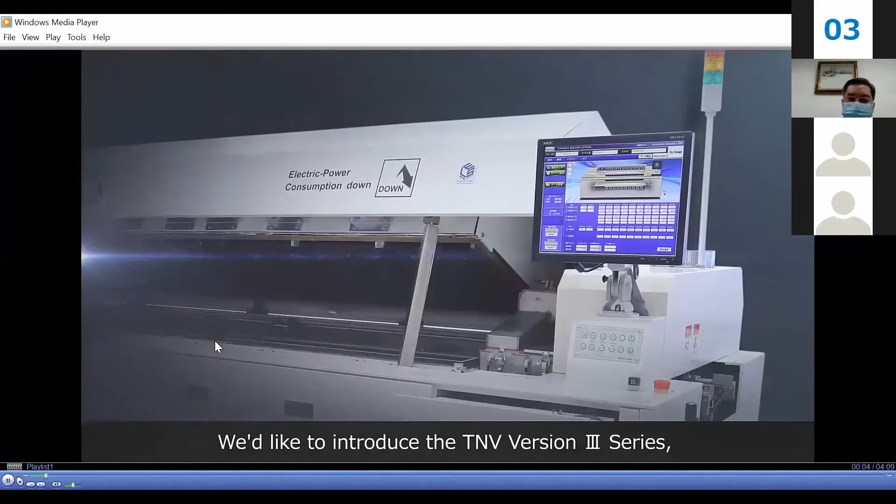Maybe I will start with sharing our product video. We'd like to introduce the TNV version 3 series, which is the latest model of our reflow soldering system, to respond to customers' needs. We believe that improving production efficiency is our most important task among all our customers' needs. Therefore, we focus on reduction of maintenance frequency, energy saving, and responding to IoT, and have improved our product to the highest level in the industry.

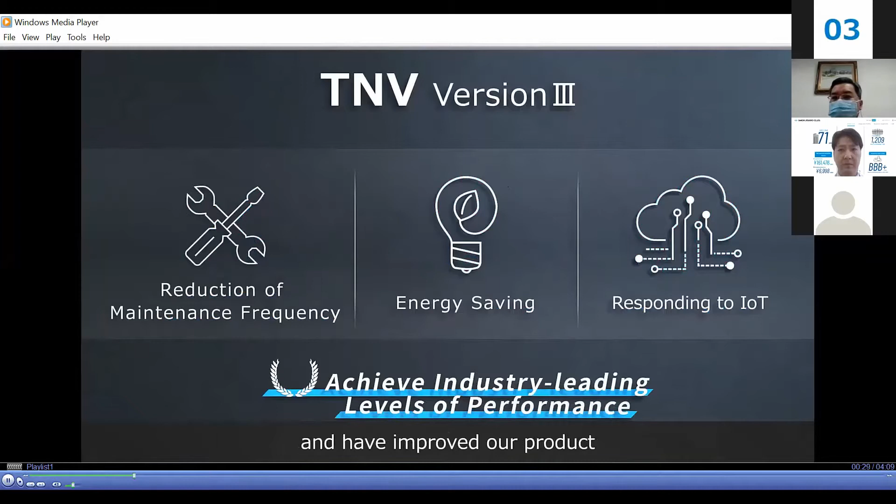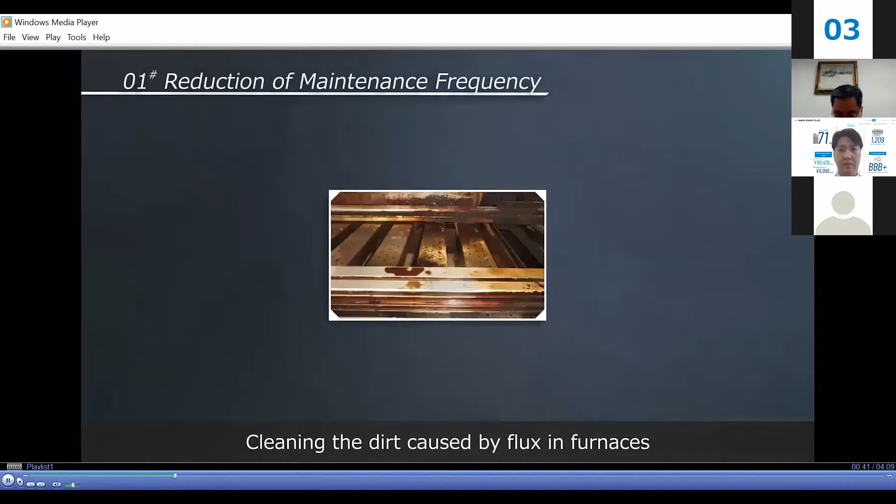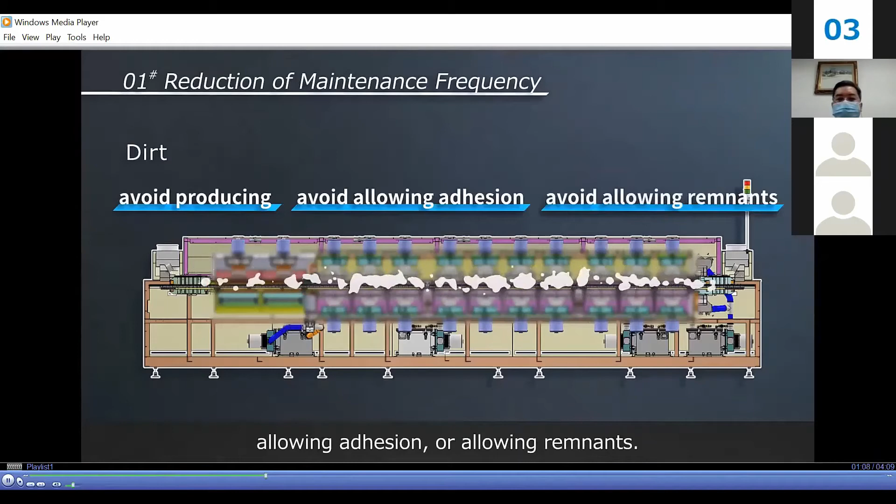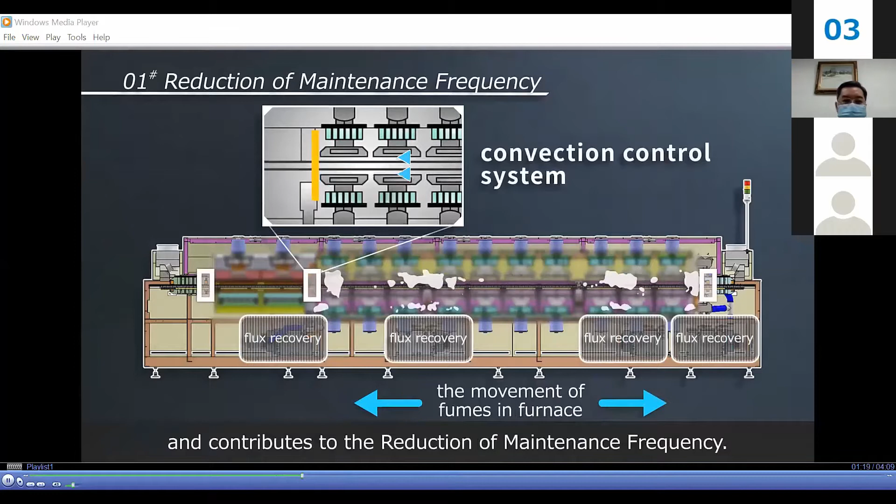First, let's introduce the reduction of maintenance frequency. Cleaning the dirt caused by flux in furnaces requires a lot of time and labor. When heating the mounted substrates, various fumes such as flux are generated in the system. We reviewed the mechanism of dirt contamination and worked to avoid producing pollutants, adhesion, or remnants. We specified the parts that produce flux fumes using convection control system that leads air to flow efficiently, contributing to the reduction of maintenance frequency. According to field test results, the cleaning cycle has been expanded 2 to 3 times.

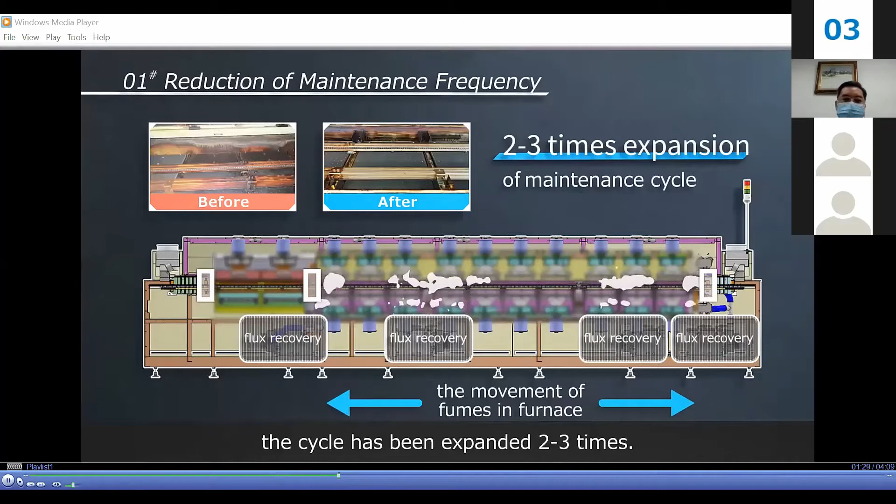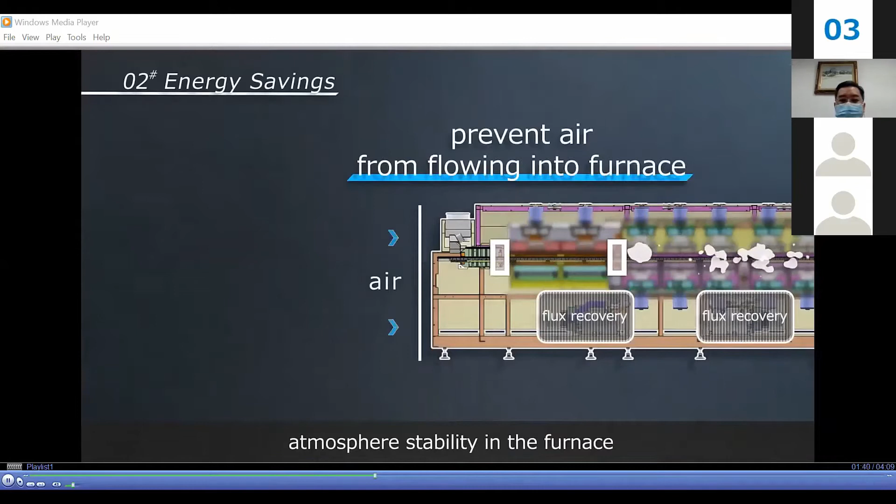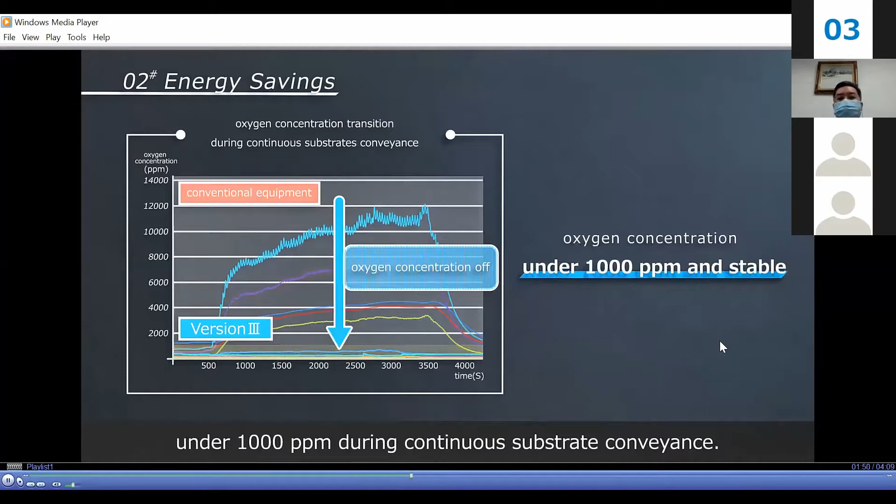Next, let's explain energy savings. Thanks to the furnace convection control, atmosphere stability in the furnace has been improved drastically. It is easier to manage the oxygen concentration in all zones under 1000 ppm during continuous substrate conveyance. In addition, by optimizing both software and hardware, such as startup system improvements, we have achieved an industry-leading level of reduction in nitrogen consumption and electricity consumption.

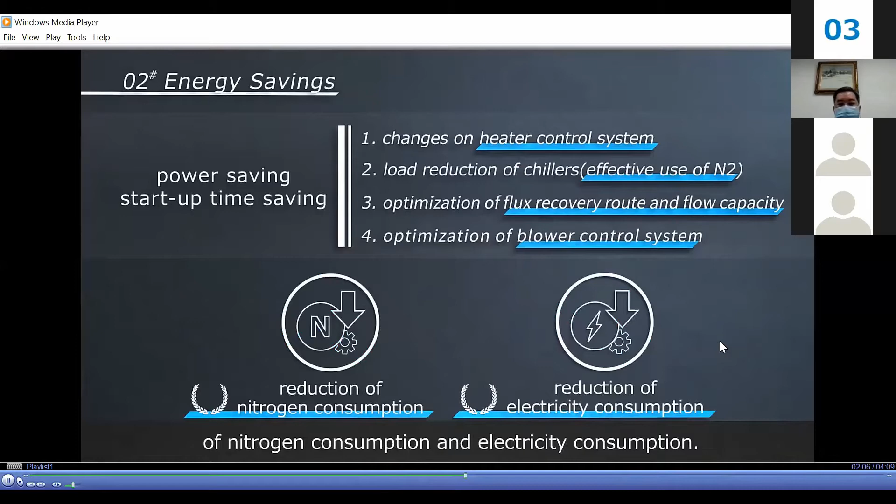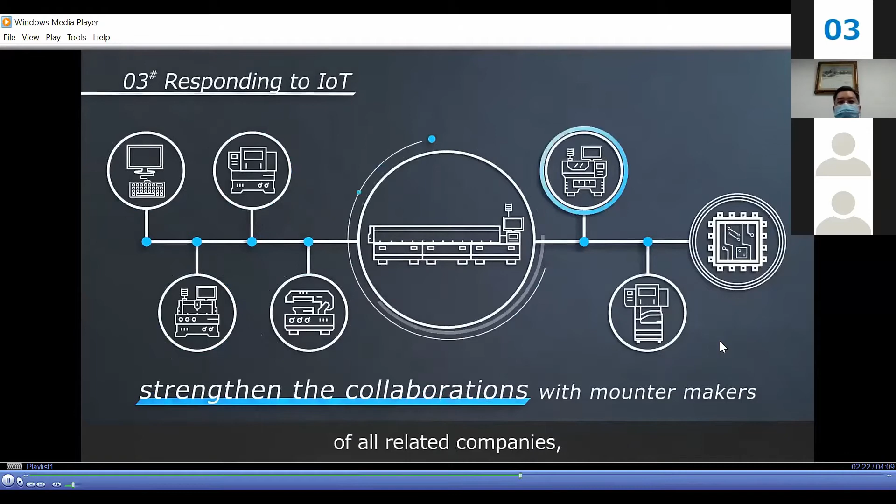Third, responding to IoT. Towards the sustainable development of IoT, we have been strengthening collaborations with mounter makers, working on automatic setup switching functions with all related companies, and coping with production control systems.

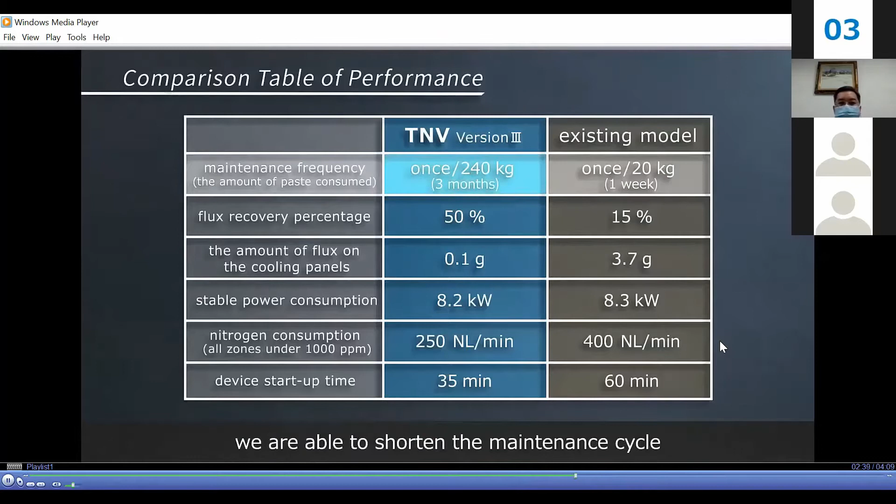This is the performance comparison with an existing model. Thanks to the newly developed furnace convection control, we are able to shorten the maintenance cycle and reduce flux drop on substrates drastically, which is a big contribution to the reduction of running costs for our clients.

Last, please allow us to introduce the lineup of the TNV version 3 series. We set up 8 zones, 10 zones, and 12 zones on the M-size model with a maximum substrate width of 300 millimeters, and the L-size with a maximum substrate width of 510 millimeters, both of which are dual-lane type.

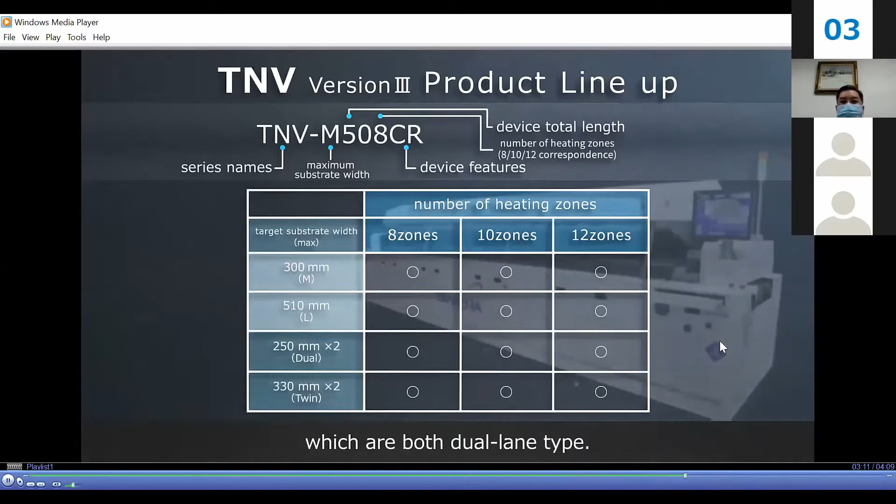We will keep on innovating the Tamura reflow soldering system to improve production efficiency for our clients. We are always aiming for reflow at the world's highest level, and we sincerely hope that you will consider purchasing our latest high-performance reflow soldering system. We seek to reduce production opportunity loss wherever possible through the reduction of maintenance frequency and energy savings, achieved through the reduction of nitrogen and electricity consumption. We will also seek to respond to IoT as much as possible going forward.

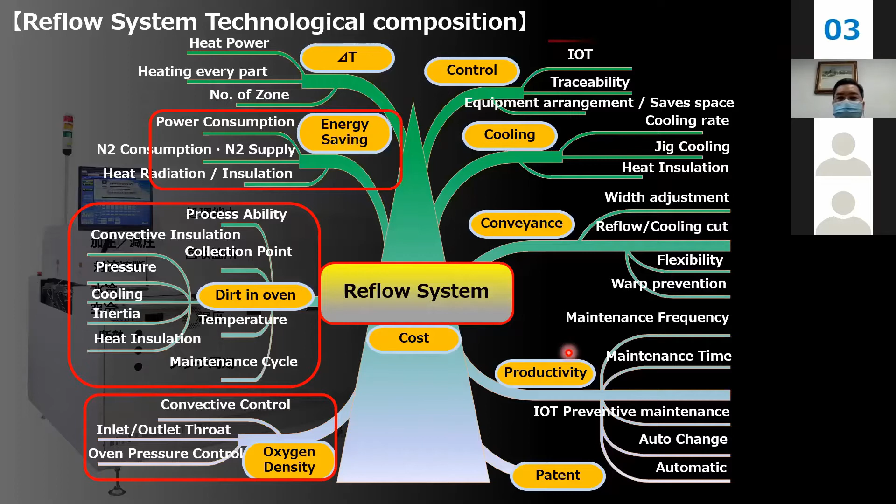Today I have 3 subjects to discuss. First is what customers want for the SMT production line. Second is the concept of the Tamura new product and its features. This is part 3 of making a good reflow system, but today I'm emphasizing making the dirt in the oven - meaning the flux issue in the oven - and second is energy saving and the reduction of N2 consumption for the best oxygen density level performance. Lastly is IoT, traceability, functions, and so on.

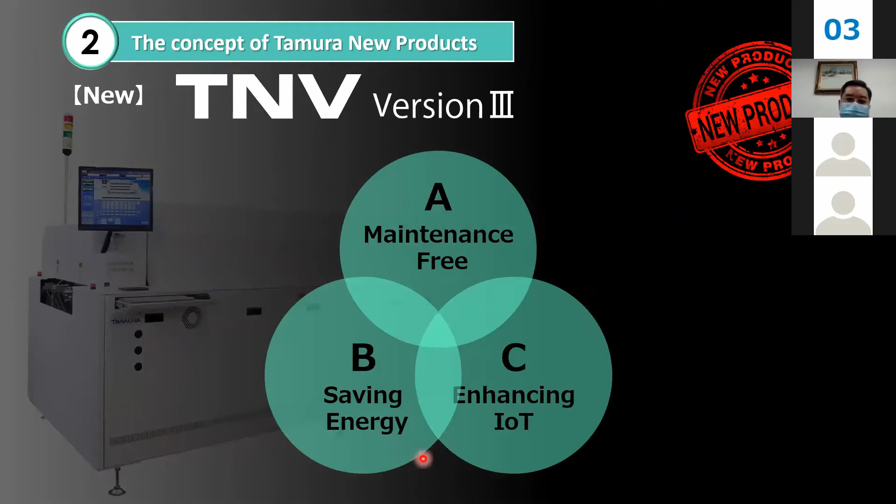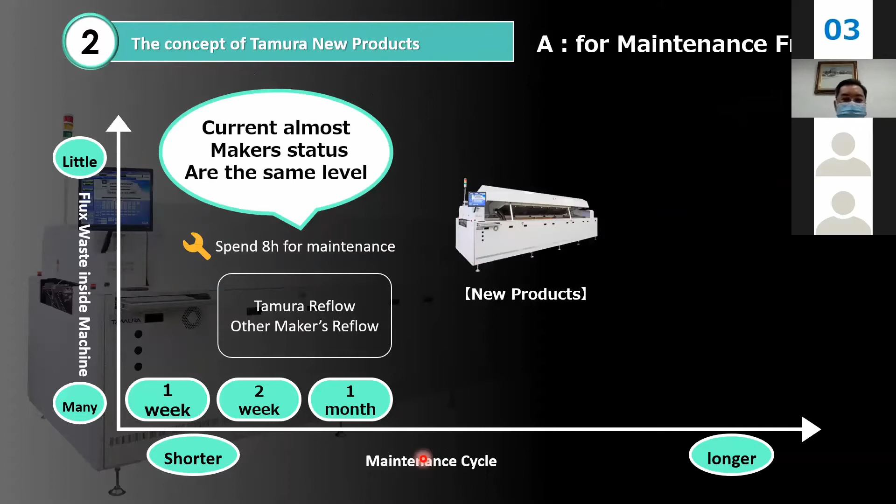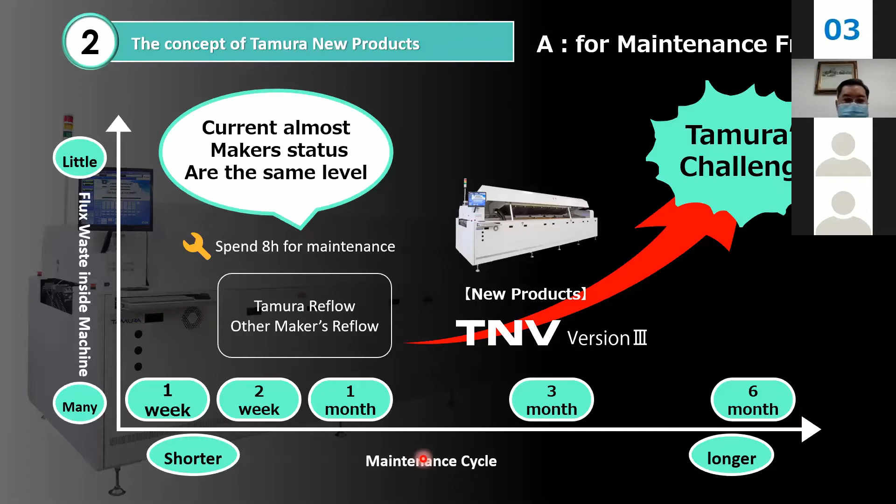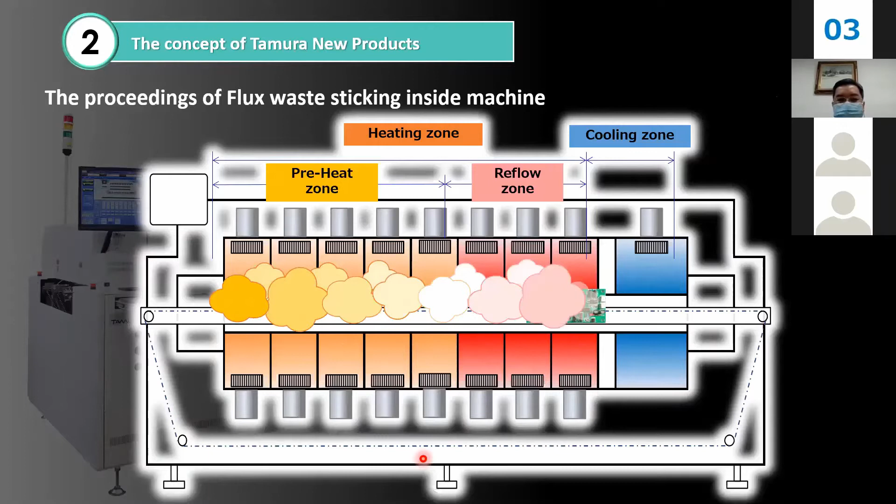This is a typical reflow process. When the PCB passes through the oven, a lot of fumes are produced, and these fumes form from gas, becoming liquid at the inlet area and also the cooling zone areas.

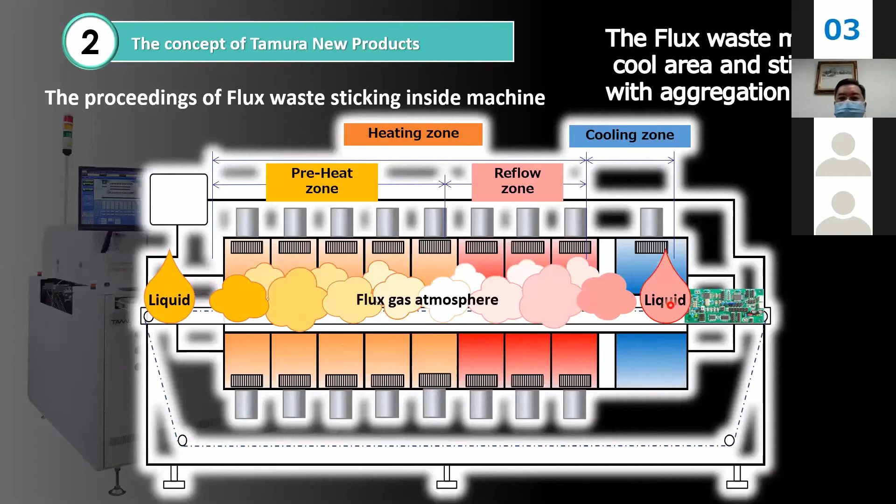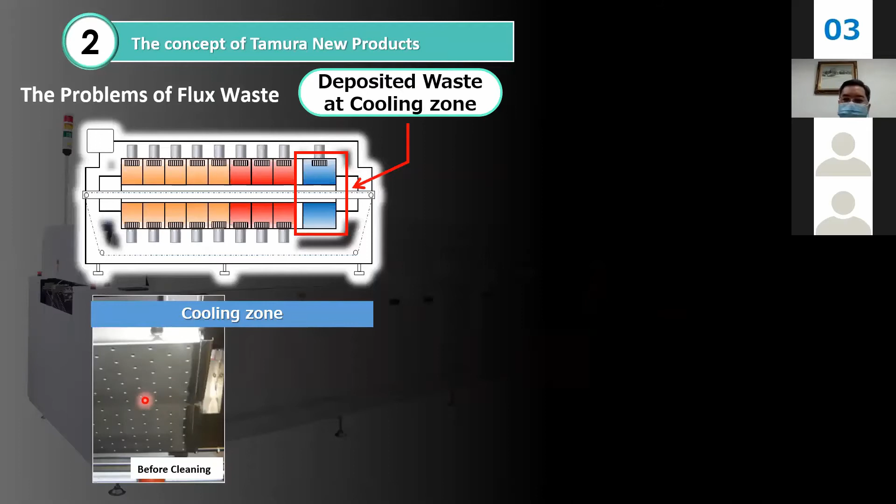So after cleaning the reflow, the cooling panel becomes clean. But a month later, flux stain accumulates on this cooling panel. If the customer doesn't clean it in time, excess flux will form and drip onto the PCB, creating a defect.

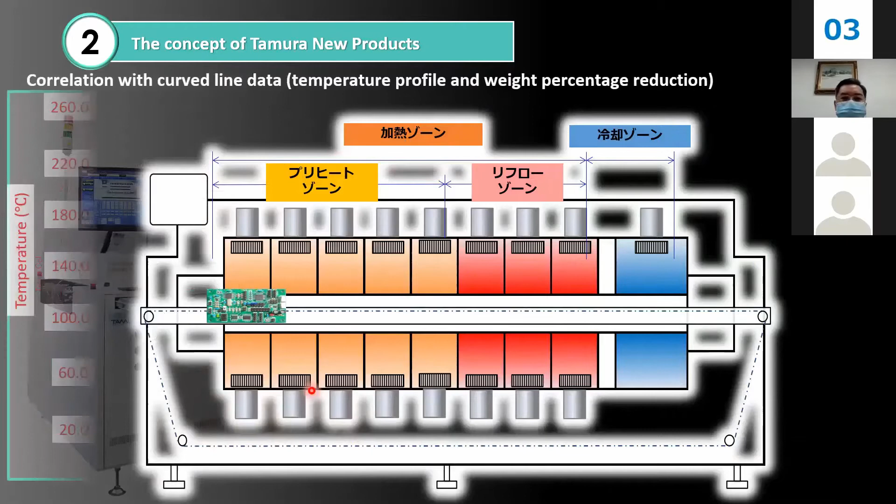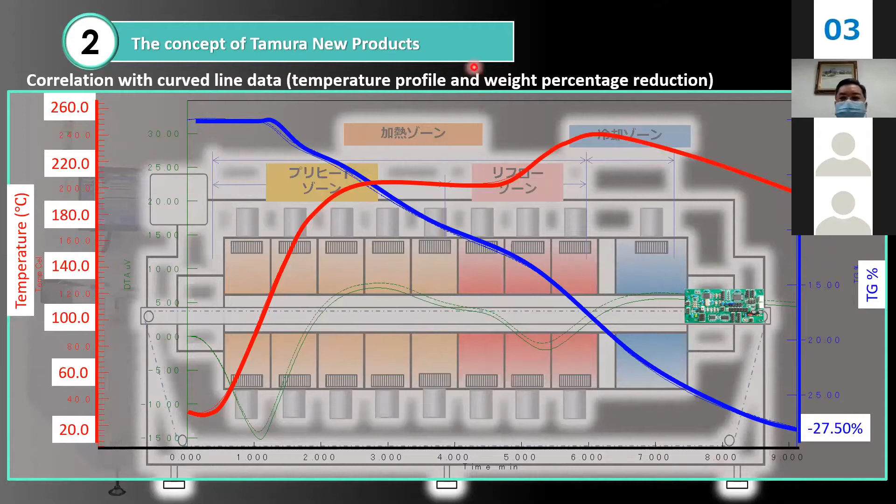At the end of the preheating, the mass has lost 12.5%, and further loss down to 18.5% when the temperature reaches peak temperature. Throughout the whole process, the solder paste weight has lost 27.5%, which means 1/4 of the paste printed on the PCB has been lost, forming flux residues and stuck in the oven.

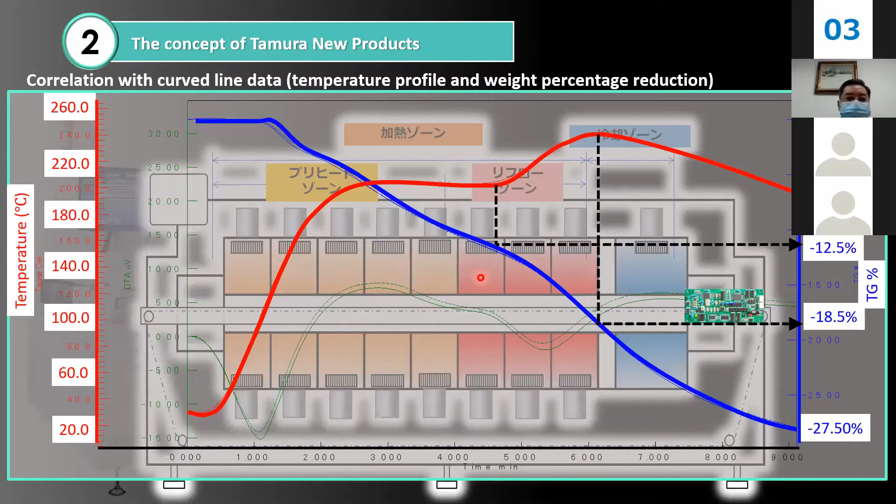We have collected both substances from the oven. At the preheating area, we collected the solvent from the solder paste. At the reflow zone area and cooling zone area, we collected the rosin from the solder paste, and this is more dark in color, more sticky, and more difficult to clean.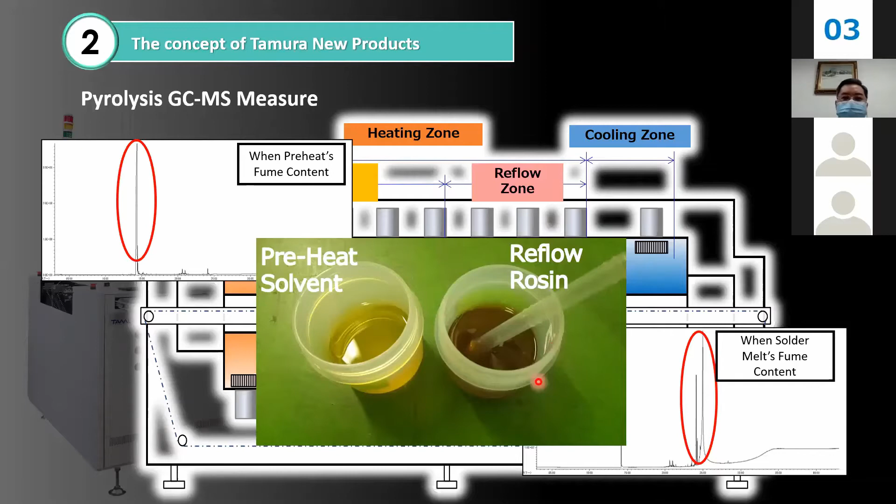This is our current model, TNV version 1 design. There are 2 flux collectors installed, with a total flux collection rate of 5 plus 10, totaling 15. The cooling panel at this area easily forms a flux stain.

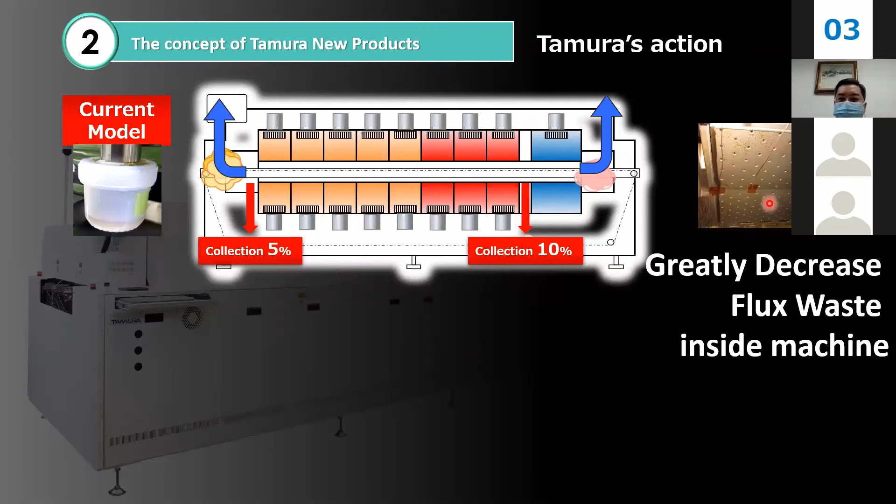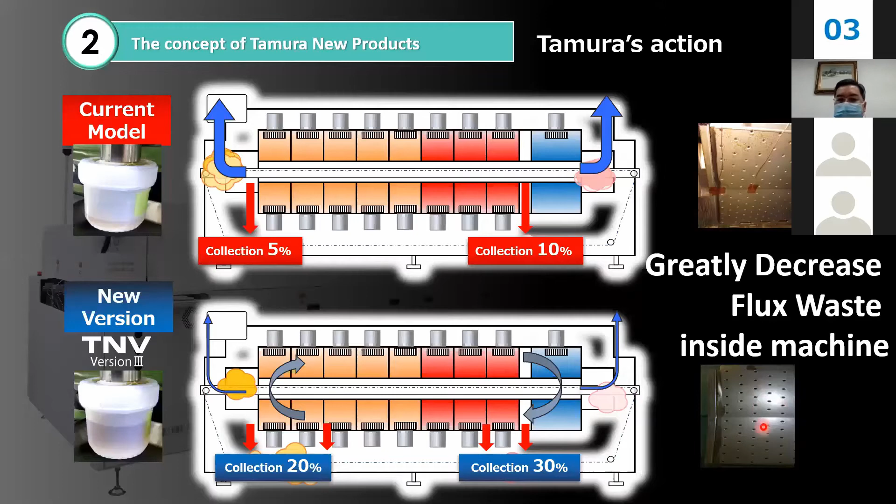As for the version 3 design, we have increased the flux collectors from 2 units to 4 units. We added 2 additional units at the preheating and also the reflow zone area, with a convex flow design that helps minimize flux leak at the inlet and also at the cooling zone area. As you can see, the cooling panel still remains clean after a month of testing.

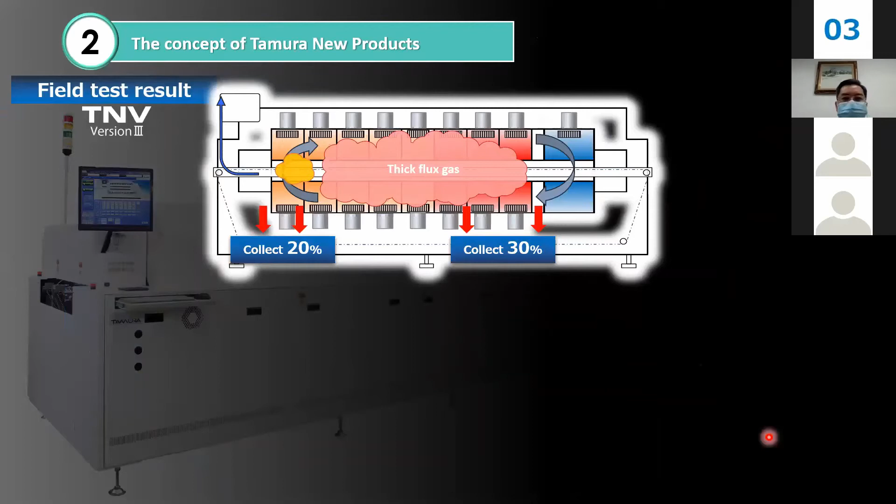This is a test from one of my customers. The first 2 flux collector units have collected the solvent, that's why you can see the color of the solvent still in liquid form and quite clear.

Compared to the reflow zone and cooling zone area installed in between the heating and cooling area, the solid flux has been collected at this flux collector. This has continuously run for a month, 24 hours a day.

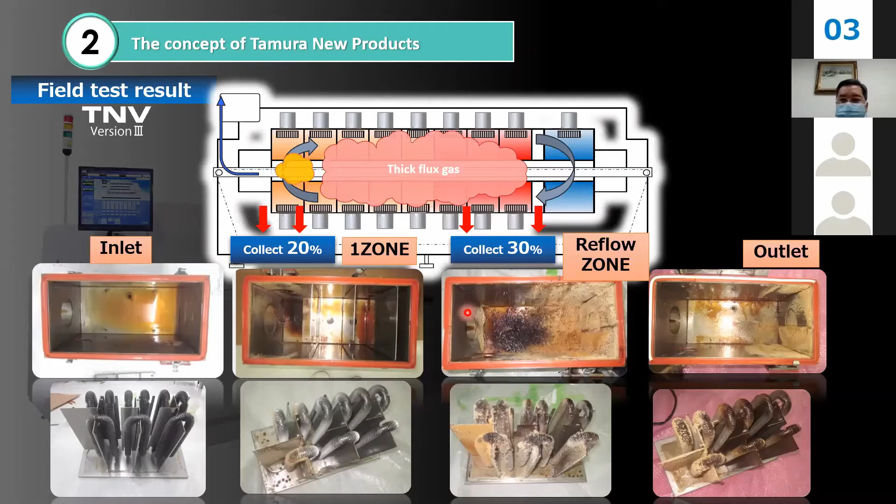With the improvement of the flux collection rate up from 15 to 50%, it helped to make the oven inside become clean and reduce the flux jam at the lead screw area. So the downtime for the machine has also been reduced.

Second topic I would like to share with you is about power saving, N2 saving, and also reducing startup time.

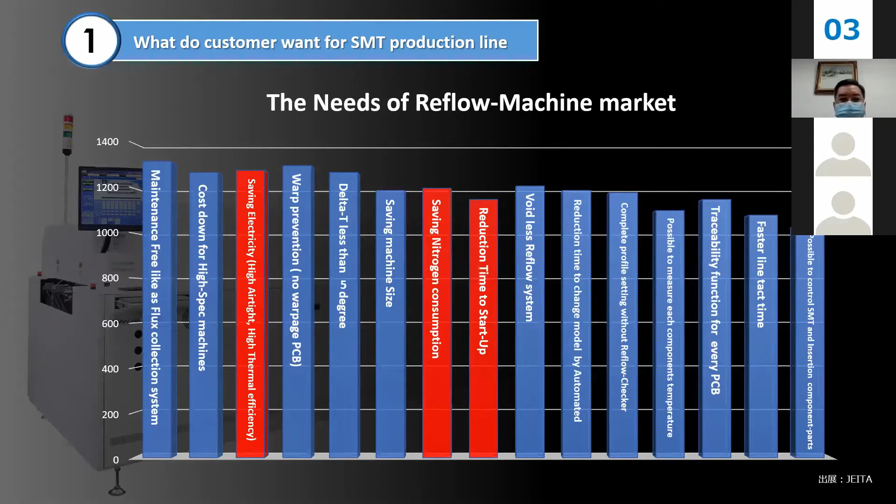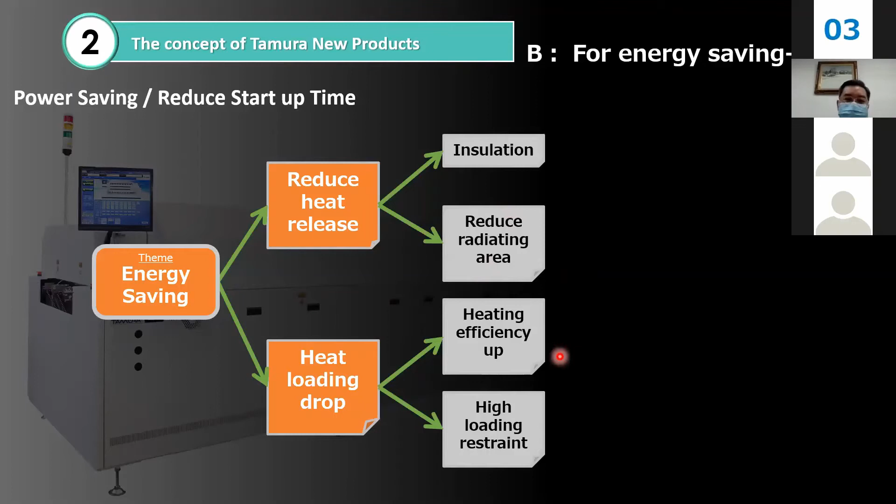For power saving, there are 2 concerns: to reduce the heat release from the oven, the heat load dropping, or reduce the heat load. So we have improved the insulation, also reduced the radiation areas. At the same time, we also increased the heating efficiency, as well as the high load restraint.

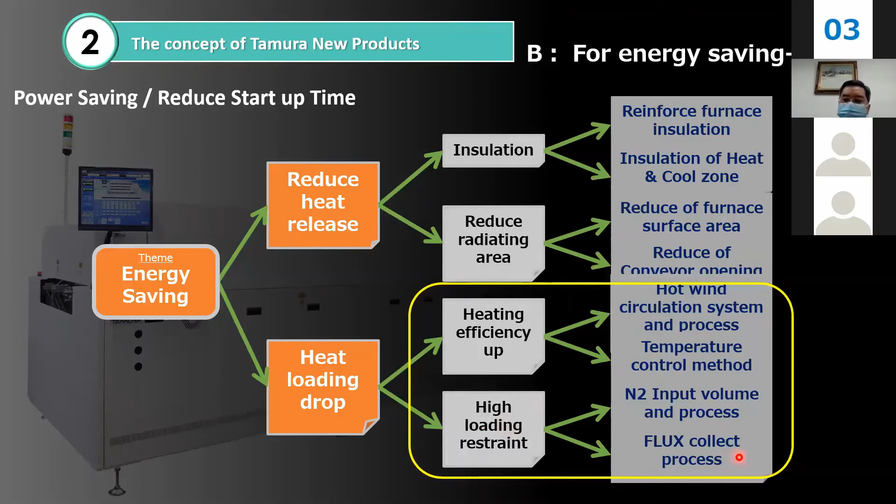There are so many things we have put effort into to improve the whole system, and today we emphasize on these areas. How we make it, I will explain in the next slide.

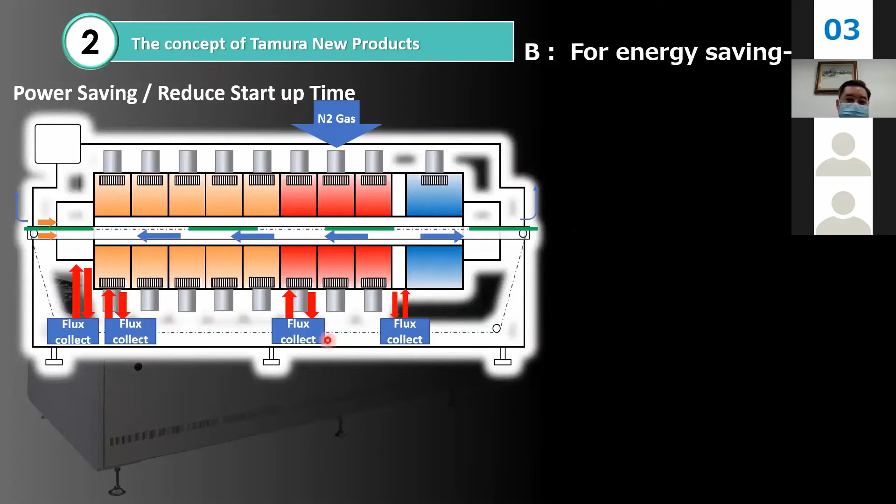For version 3, since we have increased the flux units from 2 units to 4 units installed in the system, the power consumption has gone up. As you can see from the heating display, the blue bar represents the power input into the heating zone. At zone 1, zone 6, zone 7, zone 8 there has been increased power consumption.

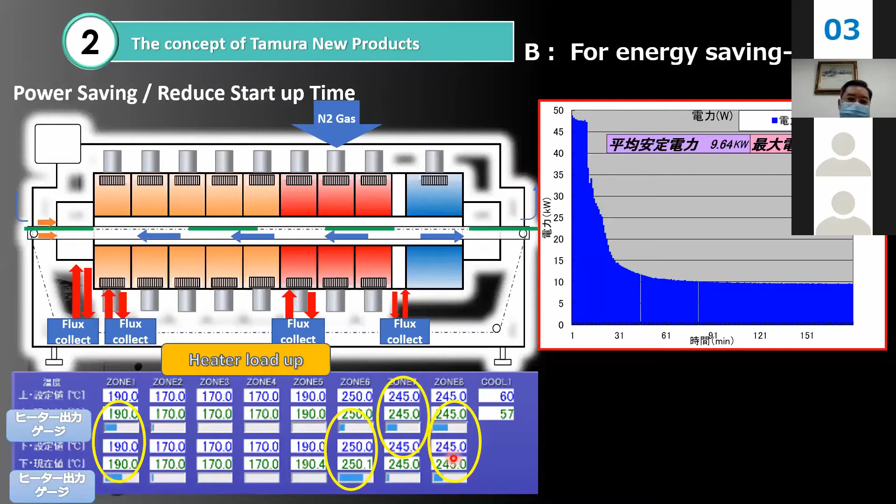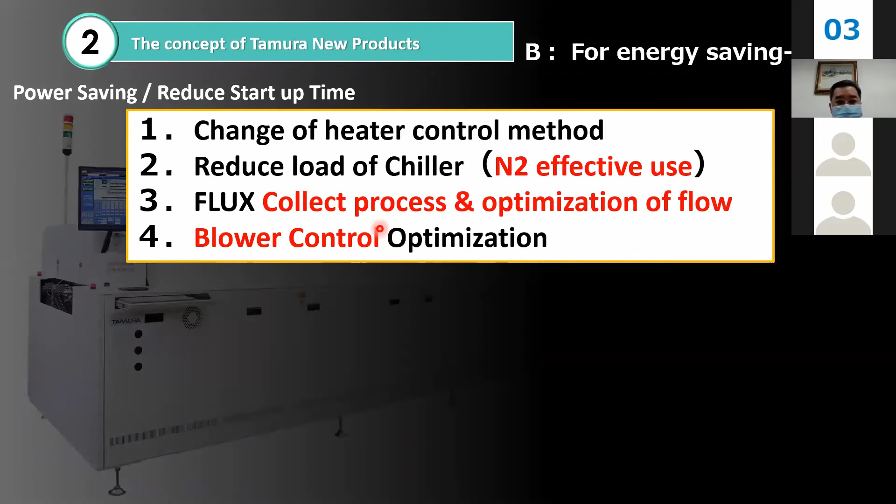But with further improvement of the heating control method, and also N2 effective use, flux collection process and flow optimization, and blower control optimization, we have greatly improved the heating up waiting time, from 60 minutes down to 35 minutes. The power consumption also slightly dropped from 8.36 kilowatts to 8.21 kilowatts.

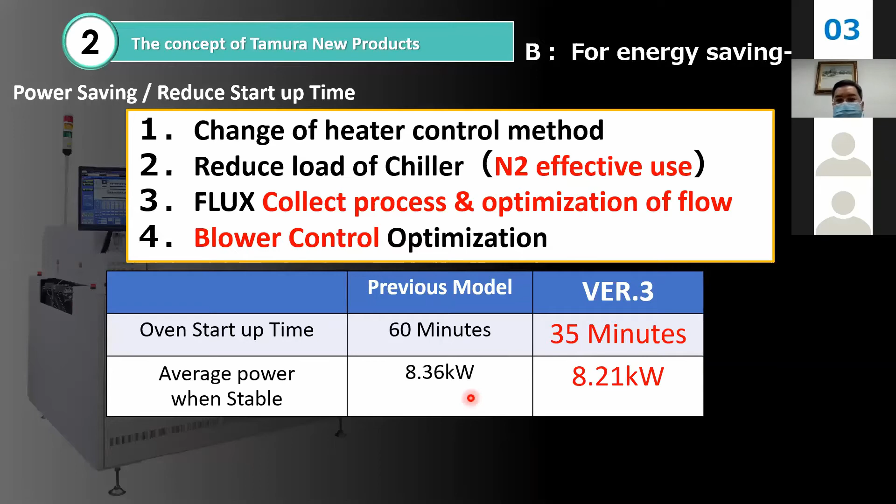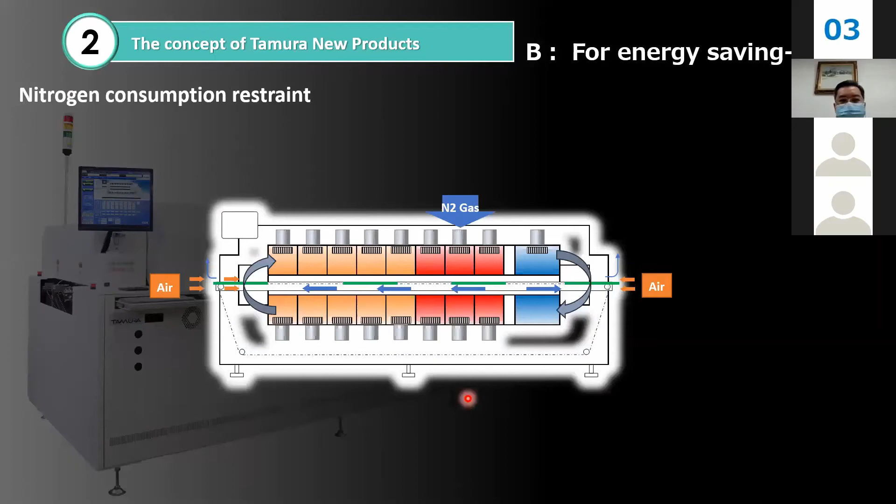Next, let's come to the N2 consumption. For version 3 design, O2 ppm is able to go down below 1000 and below, with a 250 liter per minute supply of N2 gas. This is our typical PCB size we used for testing and the blower setting.

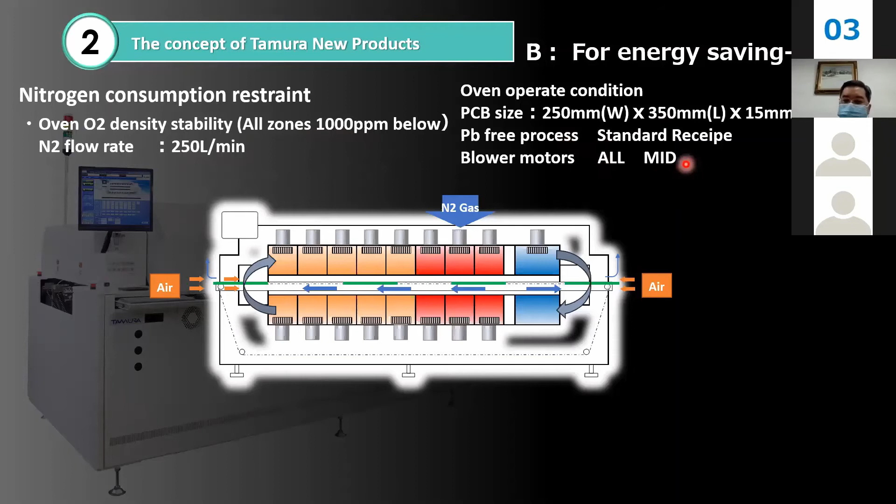With this convex flow design integrated in the version 3 system, we help plug external air from entering the oven, and also keep the flux stream and the N2 inside the oven, so that at the end result, N2 consumption is reduced. Let me show you in this next slide.

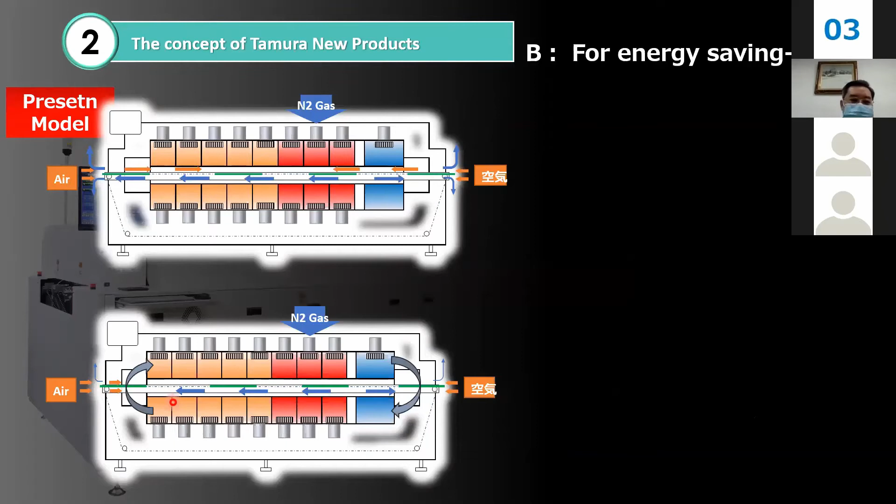For the present models, air easily falls into the oven. For version 3, it is being blocked. And this is the N2 density we have measured.

For previous models, this is the performance of O2 ppm for each zone area. This represents the reflow zone area because this is the main supply of the N2 locations, and this is the cooling area and cooling zone areas. So you can see different locations have different O2 ppm performance.

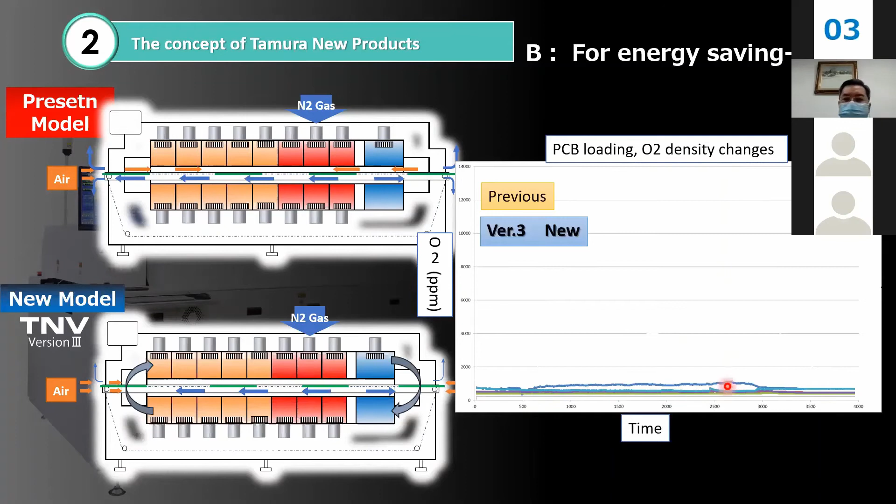As for version 3, with a convex flow design, all the heating zone areas maintain the O2 ppm at 1000 ppm and below, which means you have a great saving for N2 consumption of around 80 to 95%.

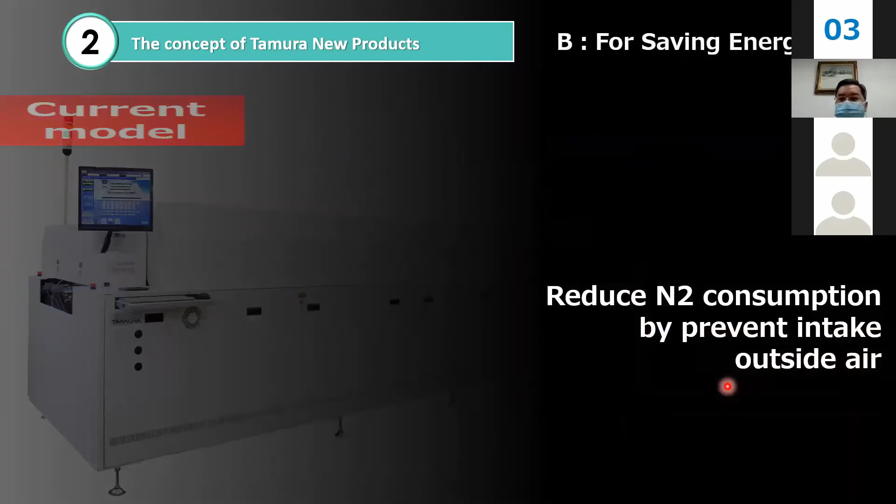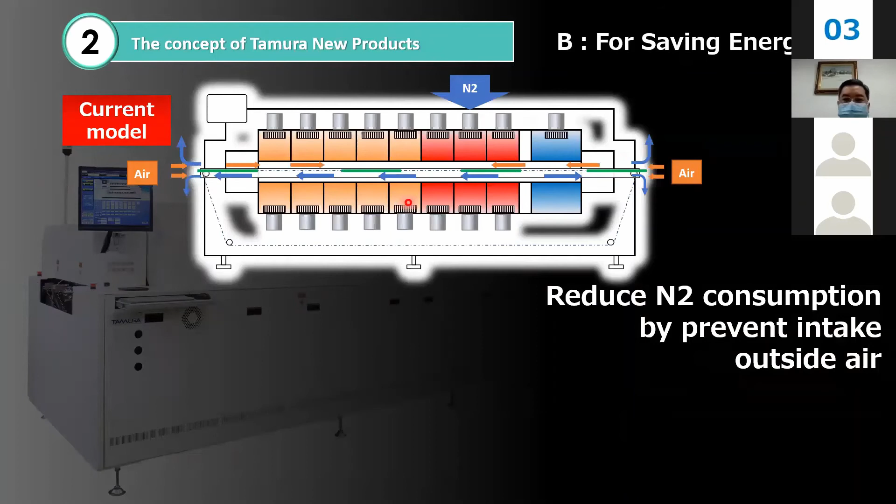And this is the current models. The performance of the N2 have been leaked and air also easily comes in. For version 3 models, air and N2 have been separated by the convex flow design.

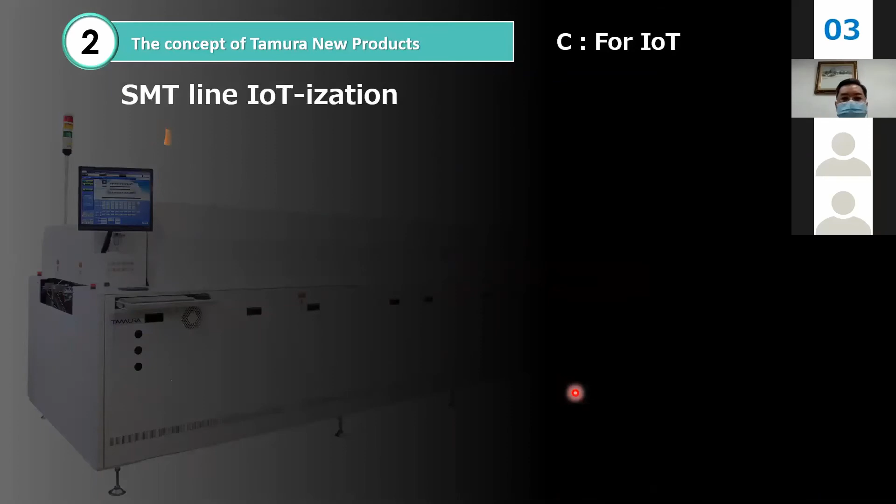Lastly, I come to the IoT. Our version 3 design is fully integrated with IoT functions, integrated to work with the Panasonic iLNB system as well.

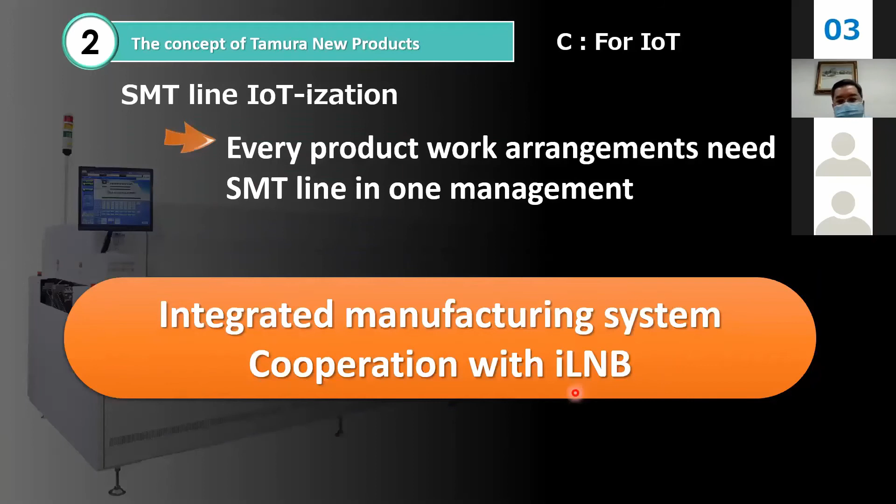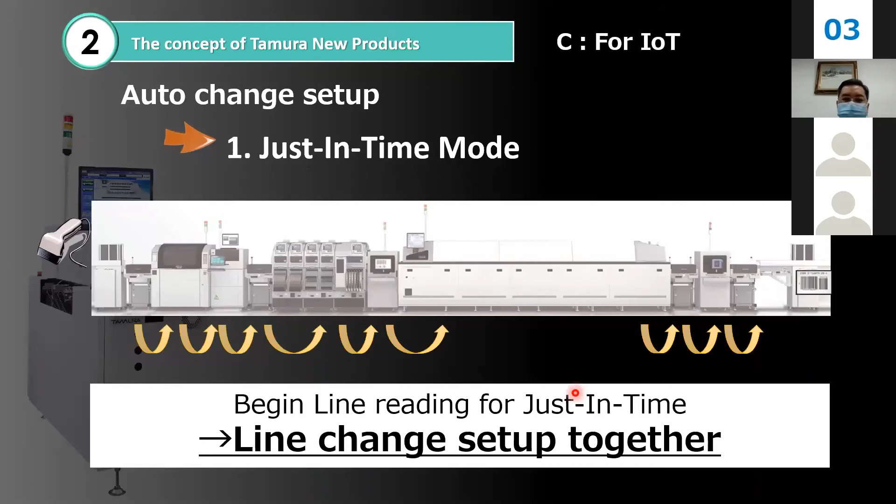So it comes with auto change setup, just-in-time mode. The product ID has been scanned, and each following machine will change its parameters, process parameters automatically. There's also auto change by PCB ID mode. If a PCB ID has been scanned, the machine also changes accordingly.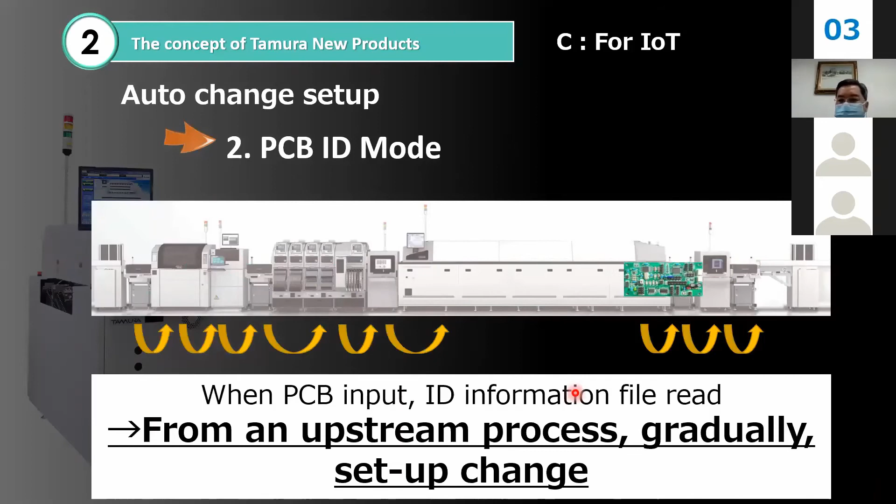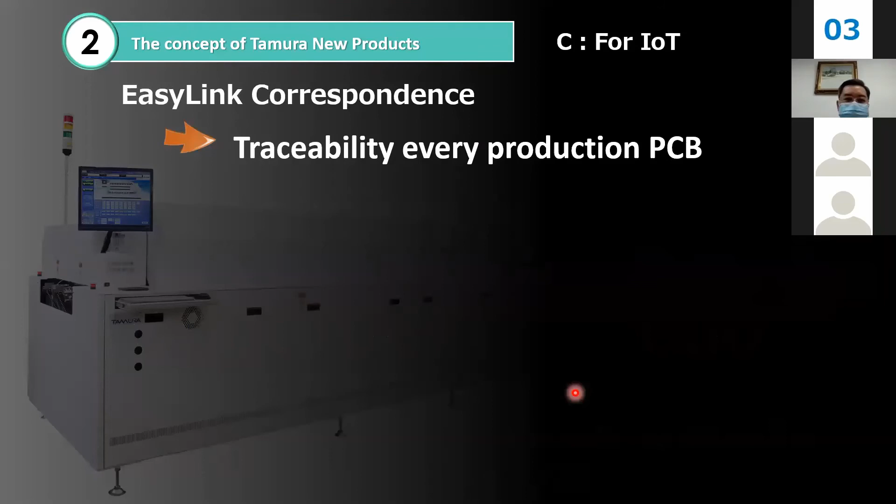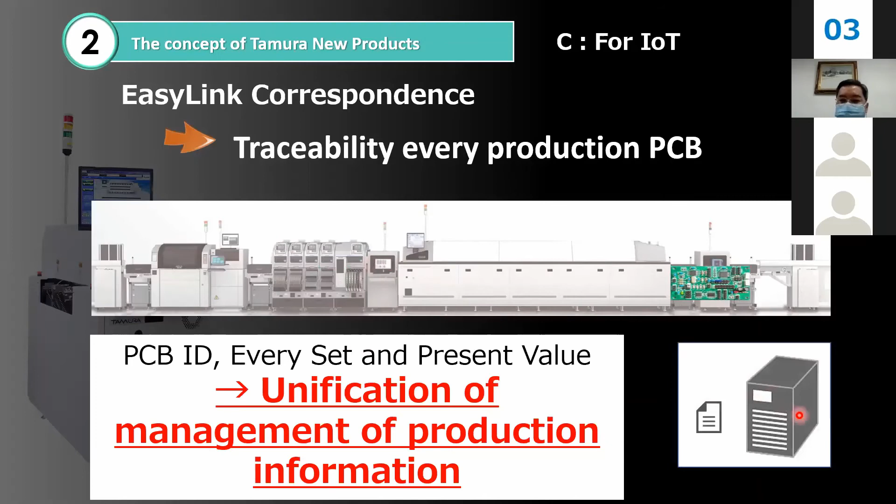So this is a conclusion comparing version 3 and our previous models. Our previous models used to have 20 kg of solder paste used in production, and you needed to do the cleaning. But we have improved up to 240 kg of solder paste use and prolonged the maintenance cycle up to once every 3 months. This is due to the convex flow design that has been installed, and also increasing our flux collector from 2 units to 4 units.

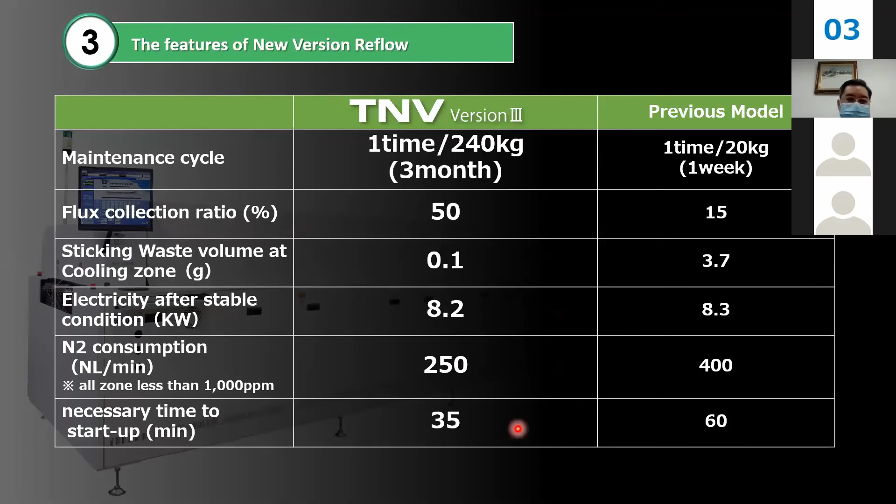So the flux collection rate increased almost 3 times, from 15% to 50%. The flux stain that stays on the cooling panel dropped from 3.7 gram to 0.1 gram. Power consumption also slightly dropped. N2 usage greatly dropped from 400 liters to 250 liters. And waiting time also shortened from 60 minutes to 35 minutes.

And this is our layout. We produce 8 zone, 10 zone, and 12 zone models. The 8 zone means heating zone only, and we have 1 cooling zone for the 8 zone. As for the 10 zone and 12 zone, we come with 2 cooling zones. So we make M size board, maximum width up to 300, and L size board, maximum PCB width up to 510.

And we also have a dual type and twin type. The difference between dual and twin: this is a single heater for the dual lane, and this is a separate heater for separate temperature control — we call it the twin type.

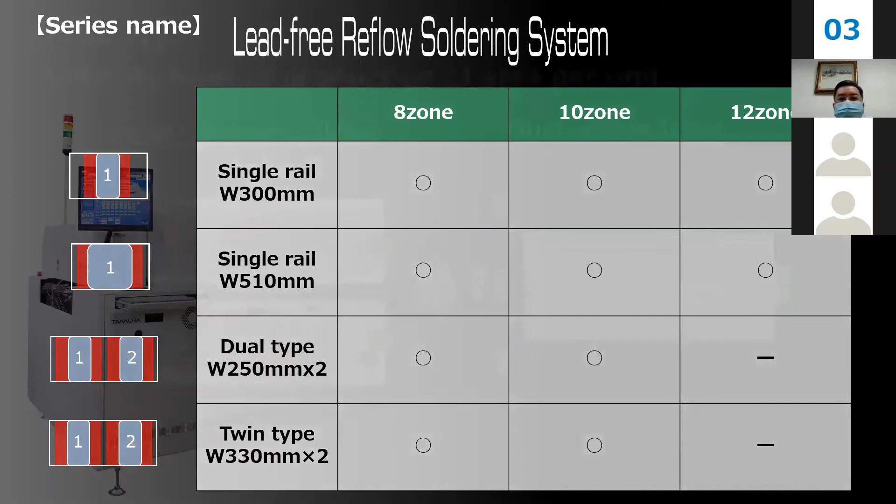The advantage of using the dual type: dual used to have 2 single reflows installed in the production line, and you can reduce the workspace. Production space has been saved by using the dual reflow, saving about 36% of the area.

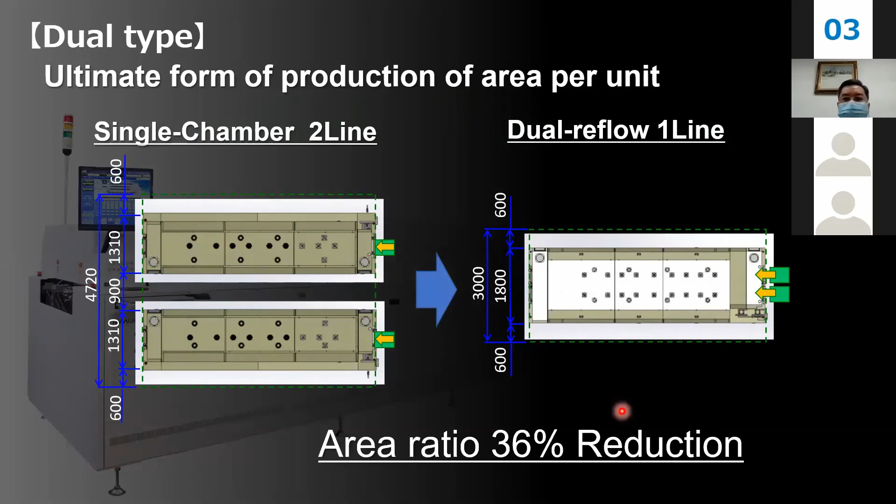And this is the structure of a dual type reflow: a single heating zone with 2 lanes of solder conveyor link, each conveyor link maximum up to 250 mm each. This is how the structure looks like.

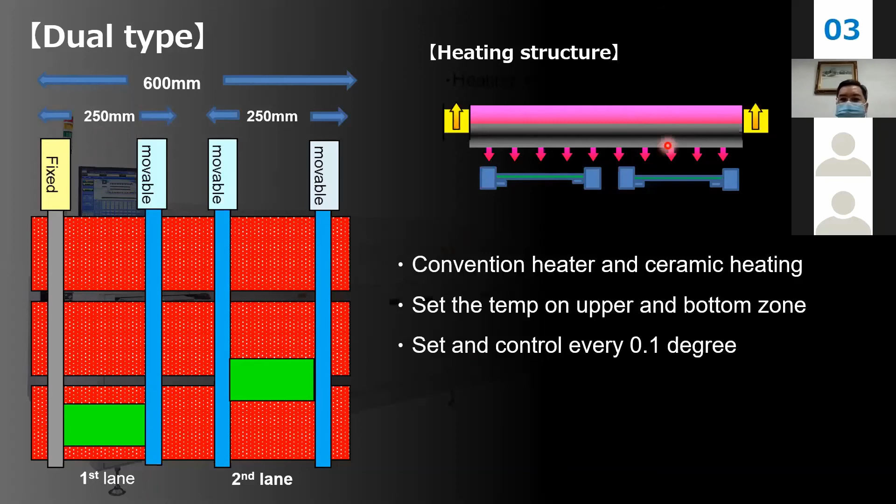Now for the twin type. Because the twin has a slightly bigger machine width, the area has been reduced by about 32%.

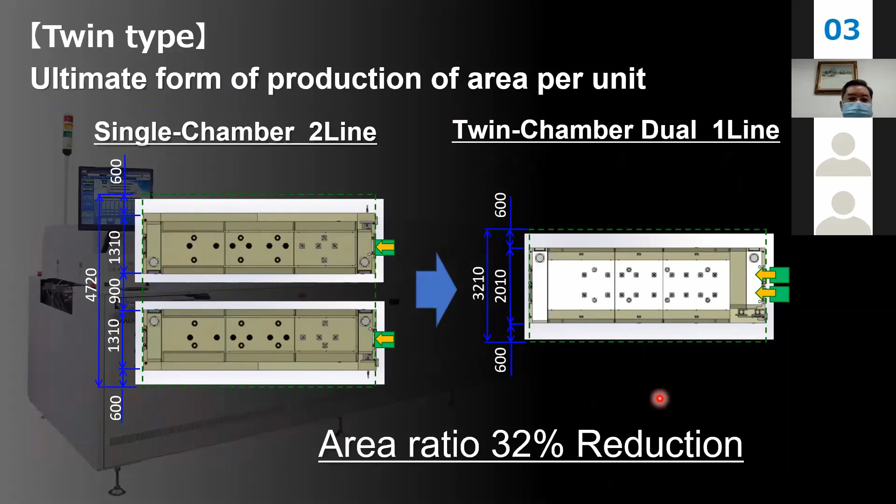This is the structure for the twin type. We install a wall to separate the 2 heaters, 2 lanes. So each lane you can have separate settings for the temperature and conveyor speed, and of course a different profile you can choose to use. Each PCB width is 330 mm each.

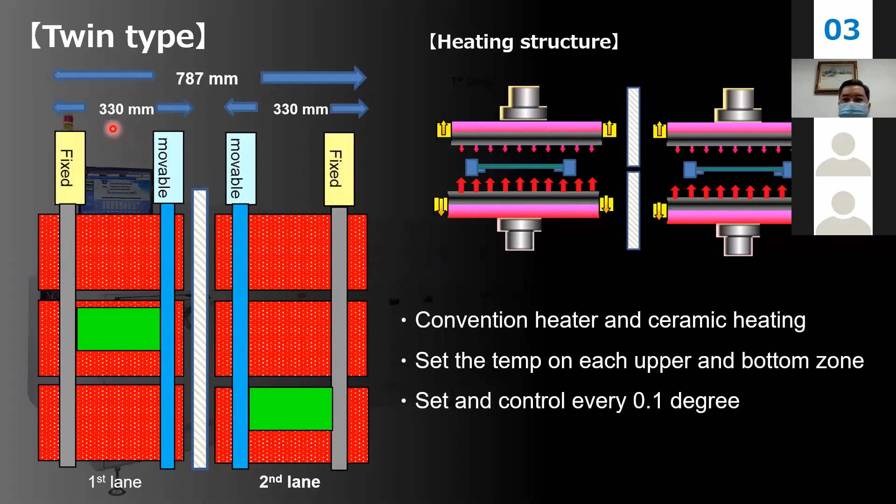And these are the differences — you can set a different temperature.

This is a typical reflow profile. You can see the setting value, ladies and gentlemen, and there is the curing profile. You can see the differences in between — maybe set around less than 100 degrees is possible, and you can still maintain a good ΔT for each profile.

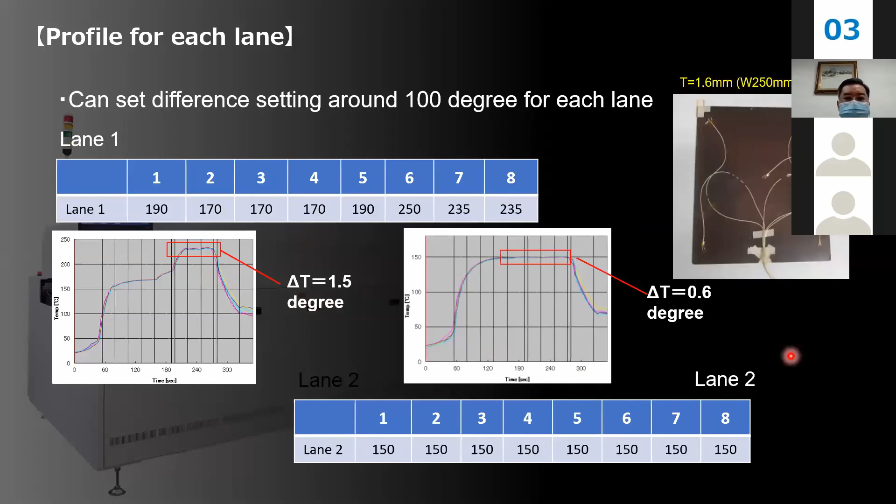The advantage for the dual or twin reflow design: we have changed the hood opening from inclined angles into the elevator type, horizontal up-down movement. This improves easy maintenance for the user, meaning the user can stand in front or at the rear of the machine and do their maintenance easily. Unlike last time, someone had to lie down and stretch their body into the reflow areas, the bottom area, to do the cleaning.

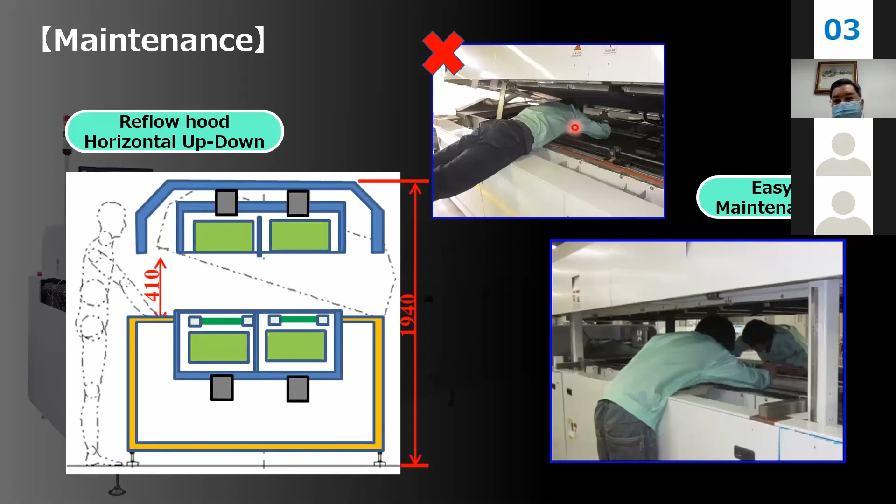I come to the end of my presentation. Thank you for listening.